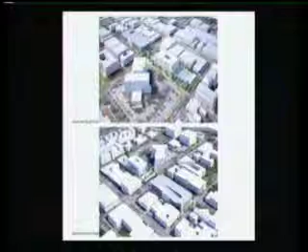We are at the very early stages of this project. It's early schematic design and data gathering, and we are in the process of due diligence, program verification, and preliminary design. It is a very early phase for us, so the idea is we're trying to do outreach and get as much input and generate as much conversation to inform the early development of this project.

So the timeliness for this meeting is excellent for us to get further input on this. What I'm going to do is cruise through this at a very high level, just to hit the high points. Please slow me down or stop me if there's something you want me to elaborate on, and I can elaborate at the end with additional questions.

As was mentioned, this is 2 projects, 2 buildings. I don't know if you can see my cursor there. I'm on the upper image. This is the public safety building on your right, and the parking structure on the left, on 2 separate parcels.

The public safety building is 3 stories above grade, 2 stories of parking below grade, a 47,000 square foot police station, fire administration, EOC, and 911 center. The parking structure is around 637 to 640 stalls, 3 stories above grade, 2 stories below grade, with an opportunity for photovoltaic panels over the entire top floor above the 3rd level of the parking structure.

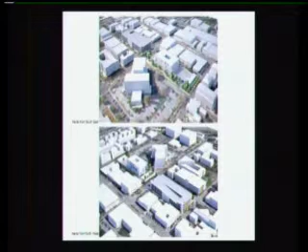These lots officially are lots C6 and C7. C6 is the public safety building lot, C7 is the parking structure. The bounding streets are Park Boulevard, Birch through the middle, and Ash, and then Sherman is the primary frontage, and Jacaranda Alley is the divider. It's a one-way alley, just to remind you, half a block off of California Avenue.

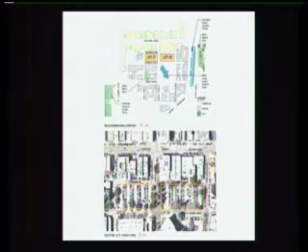Just for reference, we all agreed upon Project North is up on this drawing. The 2 existing lots are empty parking lots, empty of trees in the middle, but have a perimeter of trees around them. Jacaranda Lane goes back here, and it's all surface parking. It's unusual surface parking in that you actually have to leave the parking lot to go to another drive aisle - you actually use the city streets as part of your circulation.

Photographs of the lots - they look relatively tree covered because they have the perimeter of trees, but they are bereft of trees in the middle. You can see some of the local buildings there: the courthouse across the street, mixed use residential, and the new Visa building over on the right.

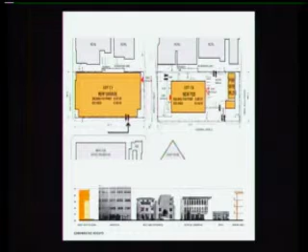To get into a little data, the height is 36 feet 8 inches to the top of the guardrail, and then maybe up to around 45 or 46 feet high once you get to the top of the photovoltaics, should they be installed.

And again, these are all subterranean. This area here are the subterranean components.

Since we're early on in the phase, you're going to see some refined drawings, but the designs are not refined. These are just illustrations to get conversations started.

You see a generous perimeter landscaping of street trees, where we can get a double row of trees. We do, and then a lot of shade and landscape opportunities on the public plaza here.

There's a heavy emphasis on pedestrian movement, so we understand the movement of pedestrians for lunchtime along Park, along Birch, and along Ash, and we're trying to make accommodations with shade and generous sidewalks in those areas. And assuming a little more passive use on Sherman, because the circulation is primarily in what we're calling north-south direction.

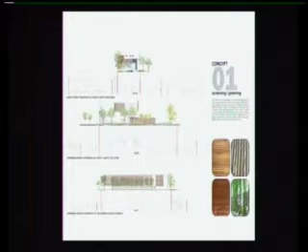Now, in terms of the concepts, I want to say that maybe concepts is even a misnomer. We have 3 attitudes, 3 approaches that we're referring to as conversation starters. The idea is we want to create 3 prototypes of how this project might face the city, get input, and from there we would then actually develop design concepts. So the idea is to gather all of the ideas together into one approach, give it an identity, and then get feedback on it.

So the first approach we're calling screening greening, and it's an approach that's based on the idea of downplaying the presence of the building by using organic and informal approaches. For instance, we might have more organic materials like wood or wood-like materials, rougher textures, stone-like textures, maybe on the parking structure, potentially vines actually on the building, dense screening using landscaping. Again, the idea being to take the screening that we're going to need to do from a security standpoint for the public safety building, where you don't want a lot of vulnerable windows, screening those windows, but doing it in a way to actually help downplay the presence of the building.

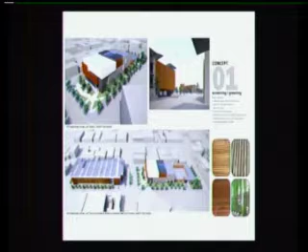These are massing models. No windows are shown. They're just massing models, again, very conceptual. But it gives you an idea of, for instance, this is the entrance to the parking structure, the public safety building here. Sample materials are on the right. And in all cases, in all concepts, you're going to see the goal is to make the parking structure and the public safety building work in tandem.

So they're sending a singular message, more of a civic presence, somewhat of a gateway towards Cal Avenue. This one uses more organic materials and a more organic screening. So that would be concept number one.

The landscape design would then follow. You see more organic materials, more informal development of the site components.

The second concept is what we're calling dynamic massing. This is a different attitude. The first attitude was downplaying the presence of the building, softening it with an organic approach. The second approach is about having a more assertive building, a little more dynamic massing, allowing the building to assert itself and be a little more interesting visually.

The color scheme is based on traditional Palo Alto buildings—terracotta, white plaster—but done in a more contemporary way. And the volumes of the building become more dynamic, like I said.

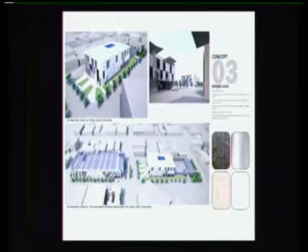The massing model here again shows the parking structure on the left and the public safety building on the right, with a similarly more formal, slightly more serious landscape approach on the site development. So that's the big picture.

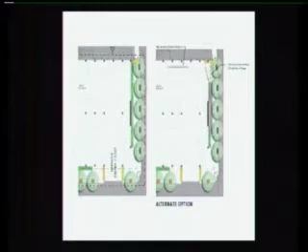So from a qualitative standpoint, the idea is to have it feel less box-like, more like a destination, with some interesting things visually. In terms of the actual design, we've not made any progress on that, it's just conceptual, and the models didn't really show that side. But it would be designed to meet that ambition, to show the staircase one way or another, have it be visually porous so that the box breaks down along that corner.

I think your concept is great. And the public safety building, which has a number of security issues, all those security issues help to really reduce the impact on the neighborhood. But it's the parking structure - if you were to adopt the first scheme and put the same foliage on the Sherman Avenue side, that would soften that building. It's going to be fairly present, is the best way to put it. So I'm just encouraging you to think of that side, because that's really the interface.

On the other side there's a brand new 2.5, 3-story building. I completely agree, and I'd add one more detail which I failed to mention, and that is not just the Nut House, but also the alley a couple of buildings over. So the idea on the alternate option is to have a little bit of an arcade with covered bicycle parking to direct you toward that alley. In general, at least at the pedestrian level, we're trying to open it up as much as possible along Sherman and the frontage of Antonio's, so it's a little more friendly on that facade.

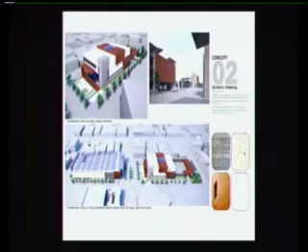There definitely will be windows, but they'll be smaller apertures because of the ballistic requirements. The goal is to make them narrower and taller proportioned so they still feel generous, but there will not be large curtain walls - it will not be a large glass building. So they do not look like gun turrets, though? They will not look like gun turrets. The goal right now is proportions roughly a 3-foot wide window, vertical proportion - you can see it here, these are approximately 3 feet wide. So no, we don't want them to ever feel like a fortress.

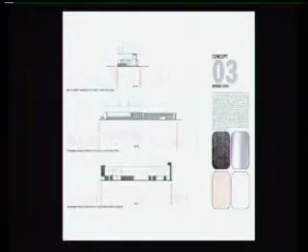It's really important, and that's a constant challenge for us designing public safety buildings - we never want them to feel like a fortress.

I think there are certain things that appear gray on your renderings. What is that? Those represent in option one, the screening, a rougher textured, maybe stone-like quality. Again, this is under the umbrella of more organic, earthier or woodier kind of materials. The gray is representing more of a stone-ish texture, and I say stone-ish because it's likely this is going to be precast concrete as the base. So we would try to achieve those textures.

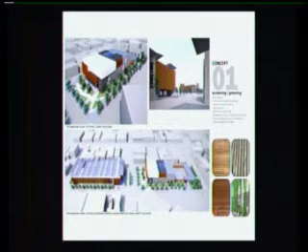You're actually looking at, for instance, this deeply textured concrete here. That's kind of what we're talking about. The grays on this one would in fact be cast-in-place concrete potentially, or precast. So those were the grays.

But again, I would say that these materials we're showing are meant as triggers for conversation, because we're not actually proposing a specific palette yet until we hear people's feedback.

I am particularly hopeful that there will be some more browns, because brown, and your indications of terracotta, some brown as well, would be very handy, or would be related to the things that are on California Avenue. Even if you don't see them from California Avenue, it carries some of the feel. Definitely, definitely.

All right, thank you. Thank you. Board Member Makinen. Thank you, Chair Bernstein. Just a couple comments. When I look at the garage structure, correct me if I'm wrong, but does it look like there's solar arrays?

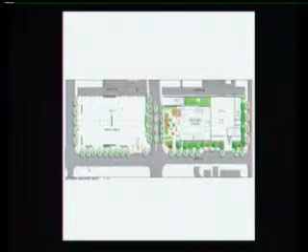Yes, so the photovoltaic panels are represented here as part of the model, and they would be relatively comprehensive across the top level. In the building sections, they're represented by the dashed line here. Do you know how much power they will supply, will it meet the needs of the building, or some percentage of the needs?

We haven't done a detailed analysis yet, but we had a couple of hopes. One is definitely to try to leverage them for as much as possible for the needs of the building. The second hope is that they could actually provide a backup function in the event of an emergency, that you could get redundant power through the photovoltaics. But we have not done the detailed analysis yet. It's a lot of panels though, so you'll get a lot out of them.

Okay, the other thing that came to mind is buildings like public safety buildings are usually very sensitive as far as intrusion of vehicles that may be carrying things you don't want around them. Ramps and things that discourage vehicle traffic become major architectural features in some of these buildings. Maybe you're not showing it right here, but the safety department was probably going to mandate some of those things to exclude vehicles from getting close to these buildings. Absolutely, they're public safety buildings.

Absolutely, and thank you for bringing that up, that is the idea. I want to remind everybody that the subterranean parking under the public safety building is property line to property line, so any planting you're seeing is actually on a deck, because there's no soil below. So the planting areas we're showing that are green are all raised planters, and we are leveraging those raised planters as vehicle barriers as well, because we don't want to have a flat site and then an army of bollards around the whole site to make it look like a fortress. So by having the raised planters, we actually get double duty.

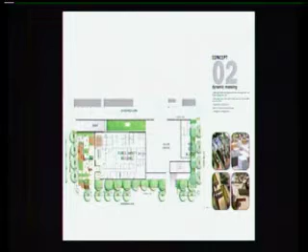You can see a few examples here. Some of these are just precedent photographs, but these raised areas can achieve our goal. These are photographs of other projects, showing they can provide the barrier and also be visually interesting and pedestrian responsive. That's the goal. But you're right, it's a significant factor on the character of the perimeter.

Okay, thank you. Just a process question for staff. On the report summary packet, page 6, it says HRB members should refrain from forming or expressing opinions either in support or against the project. Any clarification on that? This is part of a template form for preliminary study sessions. In this case, you are free to comment freely because this project is not going to be coming back to you. Great, thank you for that.

Next, I'd like to open up the hearing to members of the public who'd like to speak to us regarding this project. Are there any members of the public who'd like to speak? Seeing none, bring it back to the board for comments or opinions.

Okay, Board Member Wimmer. I think, so we won't be seeing this project again, is that what you said, Amy? That's correct. You will have an opportunity to comment as a member of the public on the draft EIR that is being prepared. There was a scoping session, and there was a notice of preparation, so comments on what should be studied were solicited, and none were received.

So I guess in terms of our board, even though we aren't seeing it again, it would be nice to see further study on the impact of the parking garage as it appears in elevation, like a street view next to our historic resource. I know there are some streetscape views in our packet, but that specific streetscape view wasn't included, which is probably what we would have wanted to see.

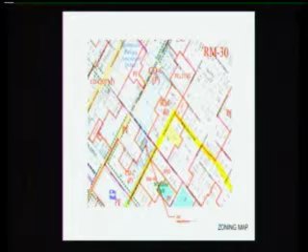To the north of the site is that new 4-story mixed-use building under construction. Behind the site is the city's parking lot on Gilman Street, an open parking lot. The surrounding zoning is all CDCP, so it has that pedestrian overlay. It is next to the PF zone, which is the parking facility, the post office, et cetera, and also a parcel away from higher density RM30 zoning. But we are all surrounded by the CDC pretty much.

This is just a figure ground study to show how the ARB likes to see these diagrams, so they understand how the massing of the figure shows compatibility or not with surrounding buildings. This is intended to display that in the site. The site is right there. So it's consistent with the development intensity around it.

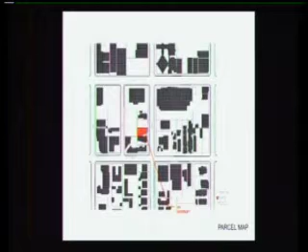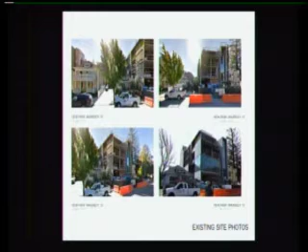Existing site views. This is the property here. This will be demolished, and there's a building behind this that will also be demolished. The 4-story mixed-use building here, obviously, and the historic house is located to the left, to the south. It's a real challenge in how we fit in with both of those very different styles of architecture, massing from a 2-story building to a 4-story building. So that was our challenge.

The program includes the construction of a new mixed-use residential office building, including about 5,200 square feet of office space and a single-family home for our clients who intend on living there. The building will step back as it rises to recognize the existing house and its scale to the south, creating opportunities for outdoor living, since we're essentially covering the site almost with the building, so we want to create outdoor living spaces.

The imagery we're working with is clean, modern forms, deep recesses, an abundance of glass, quality lasting materials. Some of these images were also used as inspiration for the 4-story building next door. This idea of an eyebrow tracery that wraps the building is very apparent in the building to the north, and that's an element we'd like to carry into the new building to help relate it. This here is just an idea of these outdoor living spaces for our clients and their young children.

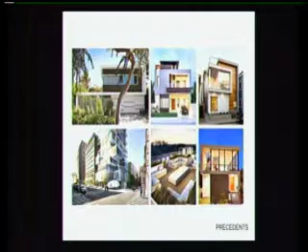So we're trying to step back, also creating the driveway on that side of the building to, again, create some open space between the historic Category 2 building and our project.

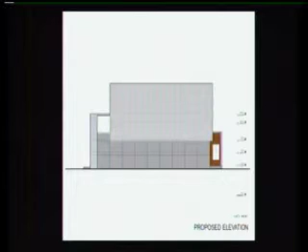This is the side of the building that faces 650 Waverly. So everything from about here forward is between 12 and 16 and a half feet back from the property line. This portion here is closer to the property line, about 20 inches, but that's also about where the transition occurs between the addition and the original building next door. So we didn't really see any impacts there, but trying to keep this part of the building pushed away.

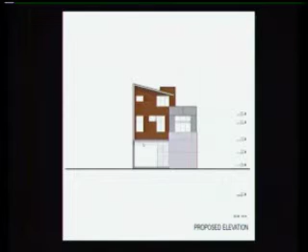And the zone in between is, in fact, our driveway. Then this is the back of the building that faces the public parking, the parking lot. I believe there's a 5 or 6 foot fence there that we're not showing at this point. But this is a residential balcony. This is all residential, and then this will be the commercial space here, and then there's a commercial space below.

So the ground floor here has the driveway located there. This would take you into where we have the residential parking. So the residential will be fully parked. They'll have a turntable in the garage. They can drive in forward, turn the car around on the turntable, and drive out forwards, so as not to create any kind of traffic issues here on the street.

We have at the front of the building a sunken garden. This glass line here that I showed you aligns with the porch here, extends down into the garden level where we intend to have trees planted, other vegetation for the benefit of not only people passing by, but also for the inhabitants of the commercial space in the basement.

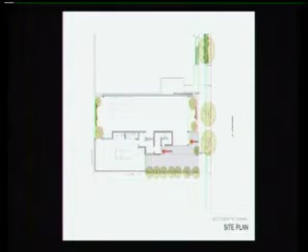The same thing happens at the back of the building, so we've had a sunken garden at the rear of the building as well. The entry to the residential portion is the furthest one to the left. They would walk in there. They have access to the elevator. The entrance to the commercial portion would be here in the front where we have kind of a covered porch, and then that porch extends back as a covered protection back to the residential entry.

Moving up in the building, this is the 2nd floor: living room, dining, kind of kitchen, living, family room. Informal area of the house spills out to a rooftop terrace here. Family room sort of divides that terrace from another terrace towards the rear. We have a work room and a project room located at this level, along with the kitchen that sort of interacts here. We envision this wall could probably open up, but it's intended to live to the outside.

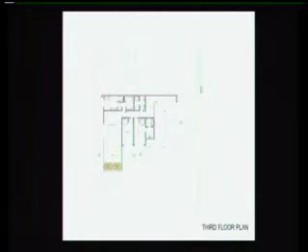And then the 3rd floor steps back further, overlooks a larger living room space with the glass that wraps the corner, 2 bedrooms, and then the master bedroom has a private balcony. On both the 2nd floor and the third floor, we would envision heavy landscaping on this side for privacy concerns, for buffering reasons, which is also something that's important when adjacent to these other residential uses.

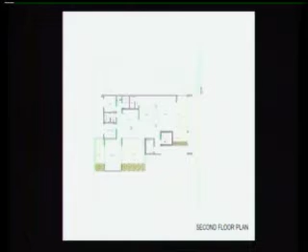And I have some 3D views that are in your packet as well. I think there's two options in your packet. We really prefer, I think, this option as opposed to the flat roof option, just because we think it helps a little bit with the transition to the residential, because it just conveys, I think, more of a residential feel with the sloped roof. This gives you an idea.

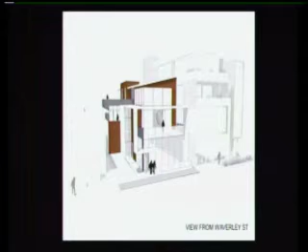The sloping roof, 4-story building behind. These are dormer-like elements that define the 2 bedrooms on the third floor. We felt that helped break down the scale a little bit, and picks up on some of the dormer elements—not copying them, but the notion of a dormer, having the mass of that roof broken up a little bit. And this is a view from the rear.

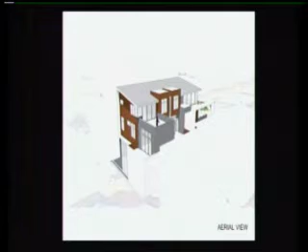Here's the historic building here. This is, in fact, the modern addition to the historic building, which is here in front. And then a view from the street with the whole composition shown there. So we've always envisioned this as a kind of a duet. This project fell way behind in the process, but way back, these had at one time been planned together.

Although working with the neighbor here at 650 Waverley has really changed this building in between, I think a lot for the better, because it tends to transition a lot better than we had before.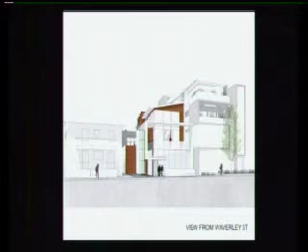That is the end of my presentation, and I'd be happy to answer any questions you have, and I'm excited to hear any comments also. So thank you. Thank you, Ken.

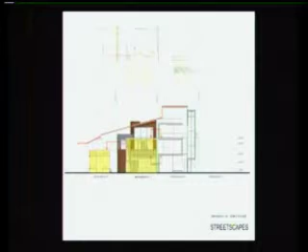You're referring to this, right here, this one, this guy - so does that slope up? Is that angle change, or am I just trying to... Maybe it's just the angle. No, this angle - I don't think we're matching the slope of the historic building. Right, okay, if that's your question, we're not. I think we're less of a slope. If we match the slope, it would jack the roof up even higher, so we were lowering that down, but it does not match.

I think the existing historic house is probably 4 and 12. That's what I assume. Okay, and I think we're 3 and 12. Okay, and the second question, kind of, maybe this is a question for the city.

So if we add this big office retail space at the ground, what's the parking situation like? Because with the structure it is now, I assume there's not really any strict parking requirements. It seems like we added one spot for the residents. So the residential is parked per the requirements of 18.52. The commercial part is in lieu - because of the size of the site, we'd be paying in lieu for the parking for the commercial. And it's 5,200, so that's 22 spaces, I think, or 21 spaces, correct? Yeah, okay.

Graham, we need your mic, we can't hear you. My apologies. Yeah, so 23 spaces proposed for the entire development, 21 of which would be paid in lieu, so just the 2 for the residential. Okay.

Board Member Wimmer: Yes, I would like to echo the concern of Board Member Bower about - nowhere on your drawings has any reference to the heights of the proposed building. And I think we also need to be reminded of the height of 636. I know that's not the subject property, but I do think that you need to include the heights of that building.

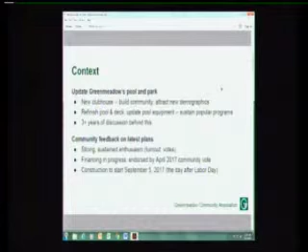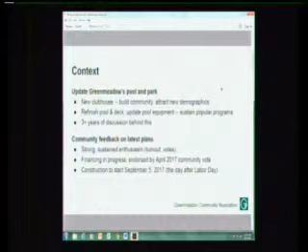So the community got together and for the past 3 years has discussed that we need to update the pool, which is very well used, and also build a clubhouse, which doesn't exist right now, to act as a community center for the neighborhood, more year-round activities. A key goal of ours is to attract new demographics, not just families with young kids, but also older people, people without kids, singles, etc., who live in the neighborhood, and we want everybody to be using this shared facility.

So lots of discussion around this. The neighborhood is extremely, extremely supportive. We just met a few weeks ago, so the neighborhood is very aware of this. The plans have been circulated, we have lots of meetings about it. And the cost is high.

I don't know how familiar you are with this, but the cost of building in Palo Alto is insane, and so we had to raise, it's costing more than we thought. We had to go back to the community and say, are you still supportive? It's going to cost us much more. And they all said yes. So lots of enthusiasm, we're hoping to start constructing the day after Labor Day.

So that's just some context on this. I was told by Graham to focus mostly on the feedback that you gave us, so I'm not going to go over an overview of the project, but here's what we heard from you guys, and here's our response to that.

So the feedback that we heard from you, and also from Jonathan Rosh, who's not here, there was a lot of feedback on the fenestration to make it more regular, more compatible with Eichlers, and a lot of you guys were like, let's get some more light into this building, so we did that. We're much happier with the windows the way that they are now.

We'll show that. Some of the points that we have to adhere to that you emphasized were the new building needs to be differentiated from the original and also subordinate to the original. So we have some feedback on that, like how is it differentiated and is it subordinate enough. There were some concerns that because the new building is higher, it may not be subordinate.

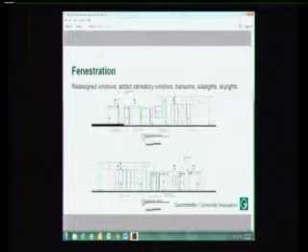This shows the main elevations now. I didn't make room for the side elevations, but they're very much redone and in keeping with today's Eichler and historic Eichler patterns—not identical, but in keeping with that.

Next, on differentiation: one thing we want to emphasize is the original buildings on this property are all entirely CMU—off-white, not a piece of wood in them really. The new building is all wood, brown wood. So it's very different in materials from the existing, but it's compatible in that some of the newer fencing added is also brown wood, so it fits in nicely, and also with the park.

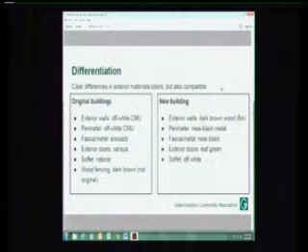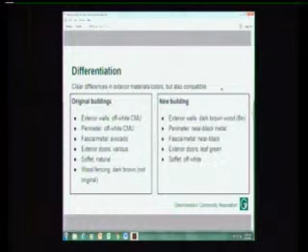You can see some of the other differences here. The perimeter is going to be a near black metal, the gates that separate the clubhouse from the pool. So it's compatible, but not identical, because all of the metal on the existing buildings is like an avocado green. So it fits in, but it is very easy to distinguish.

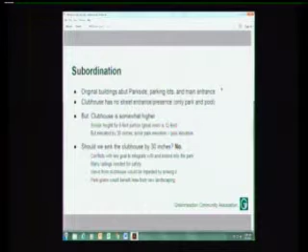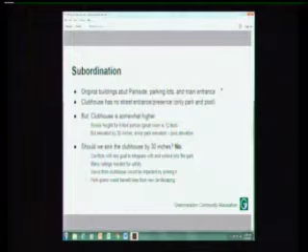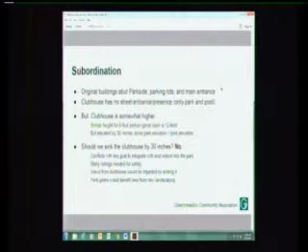Subordination is a difficult one. The obvious thing is that this clubhouse has no street presence, basically. It doesn't have an address. You can't see it from a street. You can sort of see it from Greenmeadow Way across the park, but it's small and it's back there. So in that sense it's very subordinate, because on Parkside Drive you see all the main buildings—that's the main entrance. You can't even see this from the main entrance.

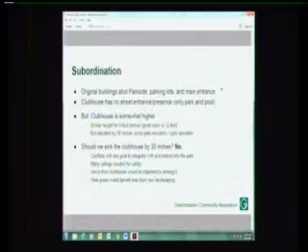There was some discussion about whether we wanted to sink the building. The height of most of this building is 9 feet, the same as the original buildings. But because the park is 30 inches taller, give or take a few inches, the building appears 30 inches taller. So the overall height is the same, but the elevation is higher, or something like that.

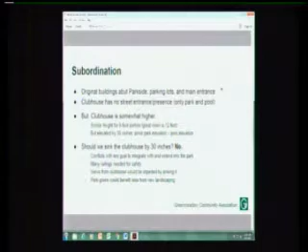We considered sinking the building. We rejected it very strongly and quickly, for a couple of reasons. One is that a key goal of ours is to integrate the park with the pool and expand the use of the clubhouse out into the park, and when it's sunk, that's much more difficult. For example, we have these dining patios, and we can extend the dining patio out into the basketball court if they're all at an even level.

Another thing is we'd have to have a lot of railings around because of the sunkenness, and that seemed to interfere with kids' ability to bike and rollerblade—that's what they do in that park. It's a great kidney bean shape, and they just go around and around, and it would just get in the way of that. In addition, we want nice views from the clubhouse, and if it's sunk you don't get that—you see a wall instead. The landscape around the clubhouse is really nice; we're investing a decent amount of money in that, and it enhances the park. If you sink the clubhouse, you sink the landscaping along with it. So for a lot of reasons, we really don't want to sink the clubhouse.

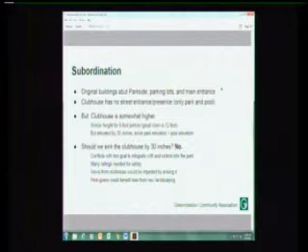We think the building is subordinate enough to the existing buildings because of its placement and lack of street presence. Next, the refuse enclosure.

This was an interesting one—a lot of constraints on where to put the refuse enclosure. Obviously it has to be near a street or parking lot so the trash truck can get in. It needs to be nearest where most of the trash is generated. We also have a bunch of easements on the property, which we discovered along the way, and we can't put it on top of an easement. And we want the neighbors to be comfortable with it.

This was something you guys mentioned, about not wanting the refuse enclosure to be in the way of the view of the historic buildings, which we agree with. It's hard to get everything answered, so I'll show a bit about that. We focused on the parking lots. This site doesn't have much street presence on other streets. There's a little on Greenmeadow Way, but it's a big park there, so we weren't comfortable putting a refuse enclosure right at the park side. Similarly on the creek side entrance, there's a nice esplanade with benches and plum and olive trees—sticking a big trash enclosure there would be a shame.

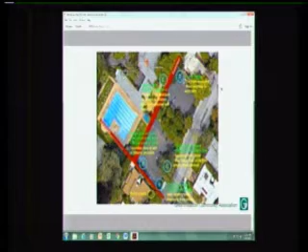Everything else is either on an easement or toward the front of Parkside, which would block more of the view. There was a nice spot in the back corner, but we'd have to remove part of the historic wall around a building we're not touching right now, so that felt more invasive, even though we could probably hide it better there. There's another spot on the other side, but it's too far from where the trash is generated and it's near a new neighbor, which would raise concerns. Nothing's perfect, but we think this is the best fit.

Some other feedback was about vertical versus horizontal siding. There was a point that the property has a very horizontal sense, which is true—all the buildings are low and flat, so maybe horizontal siding would emphasize that. But because of the windows, which are very vertical, horizontal siding would feel very broken up. We also like vertical for other reasons: since it's dark brown, it echoes the trees and fits nicely with the park, and the fencing around the site also has vertical strips. So because of the trees, the fencing, and the fenestration interrupting horizontal siding, we think vertical is the better fit.

The next question was about the roof—an interesting point you raised about the character of the great room and whether its roof should be different. Right now most of the building is 9 feet and the great room is 12 feet, like a little horizontal pop-up. You could also angle the great room roof instead, which was actually one of the drawings Cobza initially provided—that version would be higher, like 14 feet instead of 12, with the other side a bit lower at 11 feet. We ran both options by the neighbors, and they preferred the horizontal version since it's a bit lower and keeps more of the horizontal sense, so we'd prefer to stick with that if possible.